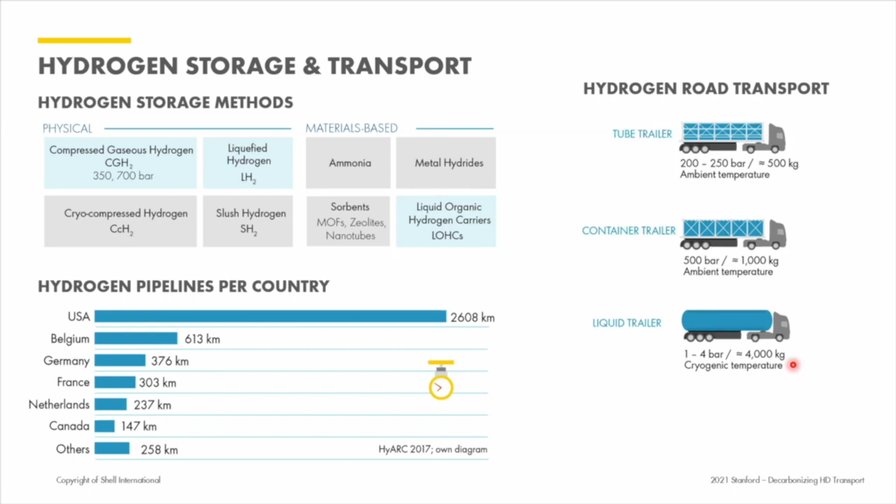For road transport, there are different ways of doing it. We have tube trailers, which can transport half a ton of hydrogen at 200 to 250 bar roughly. Container trailers, at 500 bar, can do about 1 ton per truck. If you want to transport more, it's probably best done in liquid form using liquid trailers with 1 to 4 bar cryo tanks, which can carry roughly 4 tons of hydrogen per truck.

So what are the ways to bring hydrogen to the refueling station? We might start at the top left. If your hydrogen refueling station has gas grid access, you can do steam methane reforming on site to get hydrogen. Even better is if you have hydrogen pipeline access, so it's easy to connect to that pipeline, but that's probably for the longer term.

Another way of doing it is to have an electrolyzer on site at the refueling station, producing the hydrogen you need from the power grid. If you don't have these options, the alternatives are delivering compressed hydrogen by truck, as I already showed, or delivering it in liquid form with a liquid trailer.

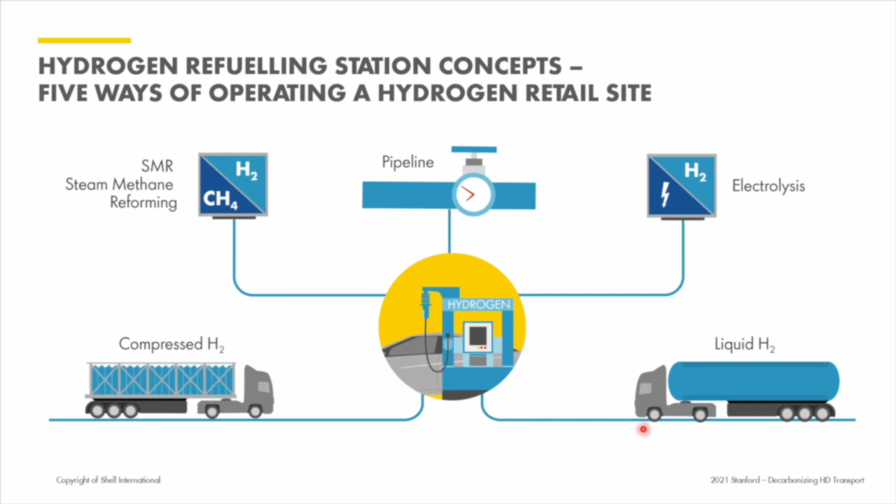Now, how does it look on a refueling station, and what are the key steps here? The electrolyzer might be on your station or somewhere upstream, but at the refueling station itself, usually what you have is a low pressure storage system. If you're delivering by trailer, swapping is a clever idea.

You might bring in a full trailer of gaseous hydrogen and take the previous empty one with you, so you have a real good swapping system in place. Then you'll need a compressor to compress your hydrogen from something like 200 bar up to maybe 1000 bar, which is needed for dispensing.

Another important piece of equipment is a cooler, needed because you don't want to exceed the tank temperature on the truck. With dispensing, temperatures go up, especially in hot weather, so you need to cool and pre-cool the hydrogen quite significantly.

At the bottom you see some numbers to give an idea of how a truck station would look versus passenger car stations. A small passenger car refueling station would probably have one dispenser. A larger one would have 4 dispensers, with a throughput of 1 ton per day, able to do 180 refuelings per day.

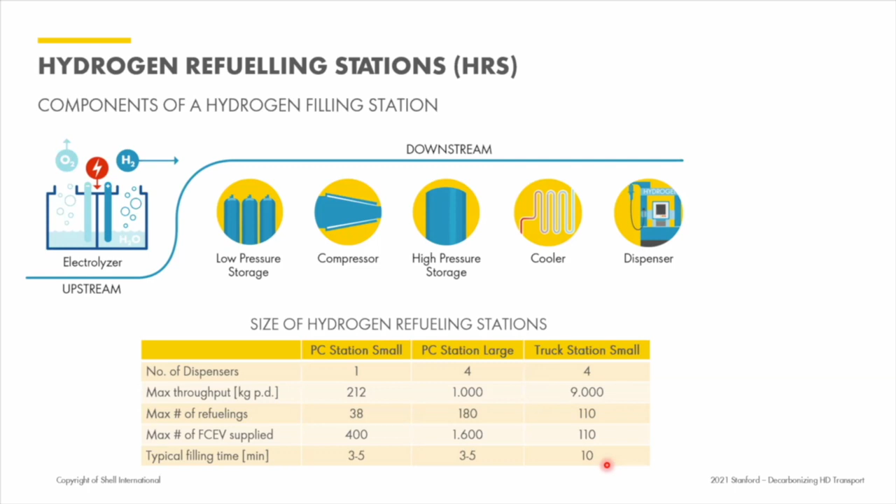Now we did a supply chain study to look into the different pathways of supply, and that is for the 2030 timeframe. I will try to get you through this without all the details, just to show you the pathways.

So here we have a pathway which is called National Compressed Gaseous Hydrogen Pathway. That would be a scenario where there's a central electrolyzer somewhere, maybe close to a big offshore wind farm or big solar field, so running on renewables. Then you would have to compress it to bring it to a hydrogen pipeline. From a terminal, you would have to compress it one more time to bring it on a truck, say to 250 bar, and then you bring it to the refueling station.

The other option is here, local case. So local meaning the electrolyzer is on the refueling station. So you only have to compress, you have some storage on the refueling station, and then you go to the dispenser.

Now we did calculate a pathway from North Africa, so sunny and windy place, low electricity cost, to Europe. Here, electrolyzer, you need a compressor to bring it to the pipeline. Then you have probably like a 3,000 kilometer, so whatever, 2,000 mile pipeline, to a cavern, to the end terminal, and bringing it per truck to the refueling station.

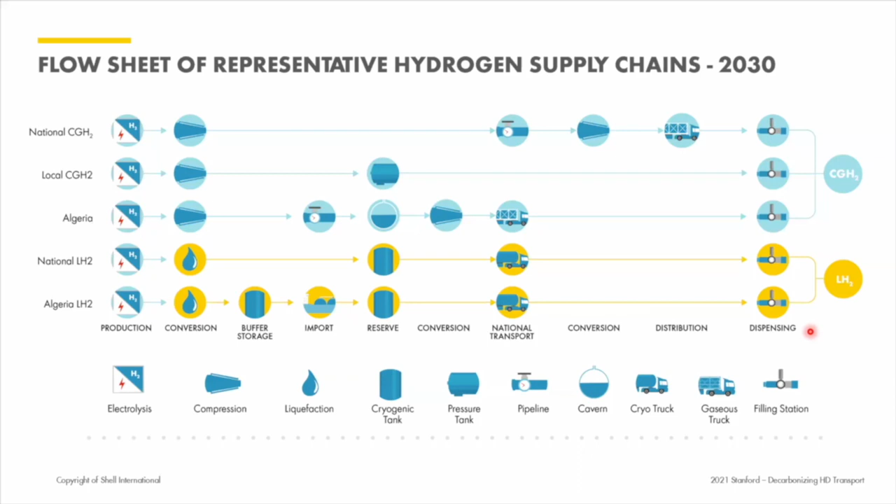So these are some of the options we looked at in closer detail. First of all, looking into the efficiency of the pathways, and that is what you can see here. So in all scenarios, you basically start with...

71% efficiency, which is due to the electrolyzer. That's what the electrolyzer efficiency is by 2030. Currently it's probably more in the 65% range, but by 2030 we think something well above, maybe beyond 70% should be possible. You have your local case here, and local means the electrolyzer is on site, as I said, of the refueling station. Along the supply chain you don't have a lot of losses, and that is why obviously the local case is the most efficient one.

If you go to 350 bar dispensing, you are probably here. You don't lose a lot because the effort is not so big. But if you want to compress to 700 bar, you lose some more efficiency here because of the compression. This is a national case. You have some more losses here because the supply chain is longer and you have longer distances, there's a pipeline in between, etc.

For the Algeria case, here you have significant losses as well when you come to the very long pipeline, like probably 2,000 miles. You lose quite some energy here, and then you're somewhere mid 50, close to 60% overall efficiency. Now if you go to liquid hydrogen, the big loss here is at the beginning, where you liquefy. Liquefaction is quite energy intensive, and you won't get that back. So in the national case, you have a little less losses to bring it to the dispensing. From Algeria, you have more losses because you transport by ship and you have boil-offs on the ship as well.

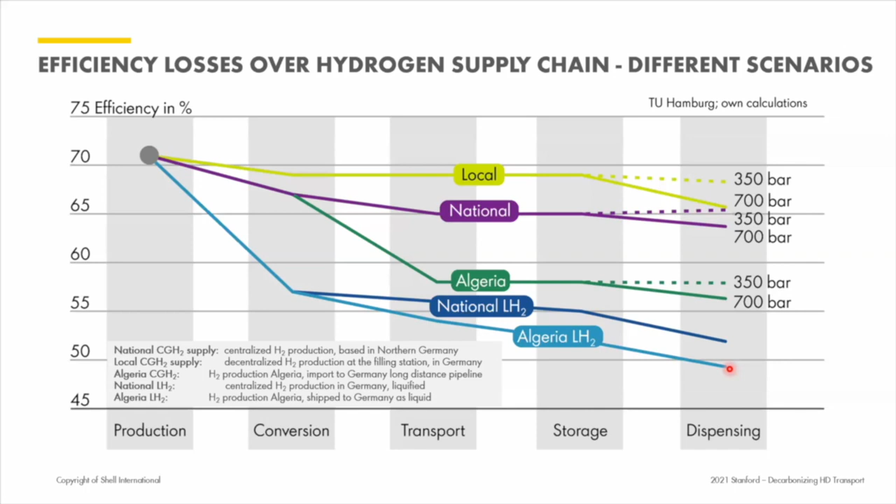Now, as we all know, efficiency is only one thing. It's important, but it's not everything. And even more important than efficiency is, of course, cost. And that is on the next slide, and you can see that here.

Now we have set the national 700 bar case on the cost side to 100%. We didn't put real cost numbers here because they vary very much, for example, with the electricity price. But basically, our base case, you can think of 100% here as something like, for the 2030 timeframe, possibly $5 per kilogram of hydrogen at the refueling, at the pump. So that's something which looks very feasible.

Now, if you do this on a local basis, so you have the electrolyzer on the refueling station, you have higher cost, and that is mostly because the electricity is more expensive, because you are somewhere at the end of the grid, and it's simply more expensive than if you were close to, say, an offshore wind farm, where you could take renewable electricity right away.

Interestingly, the Algeria case is at a similar level compared to the national production of gaseous hydrogen. So electricity is a lot cheaper in Algeria because it's sunny and windy, and renewable electricity can be produced a lot cheaper there compared to, say, Central Europe, which is this case. So electricity is cheaper, but then you have the longer supply chain and all the pipeline system, which creates costs.

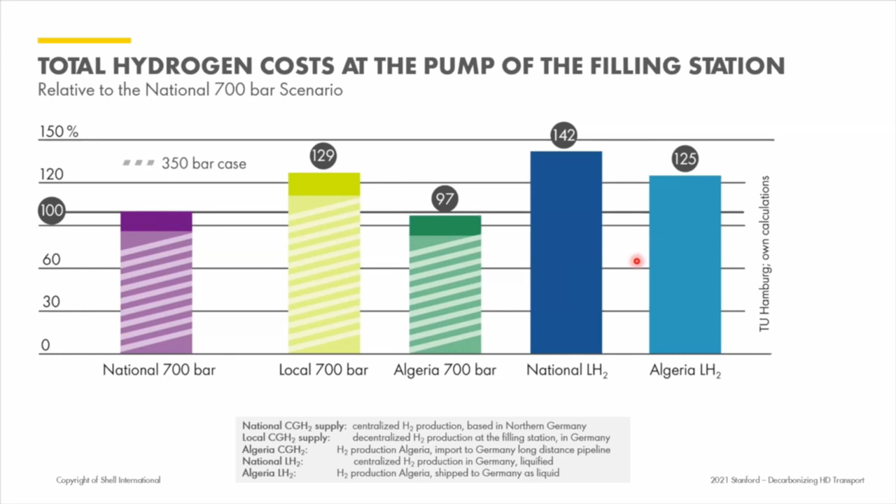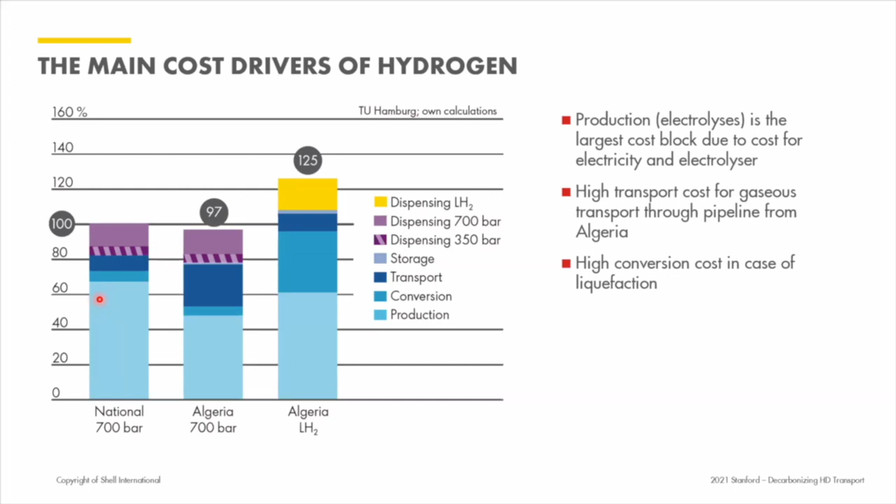And again, for the total numbers, keep in mind something like $5 per kilogram is probably where we'll end up. But every cent of lower power price results in 50 cents less per kilogram of hydrogen. So there's quite some room for cost reduction still, if electricity, especially renewable electricity, gets cheaper.

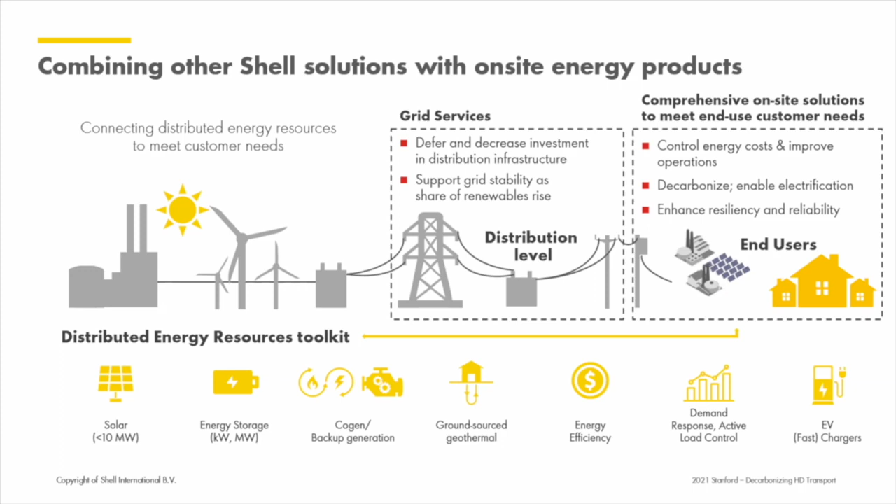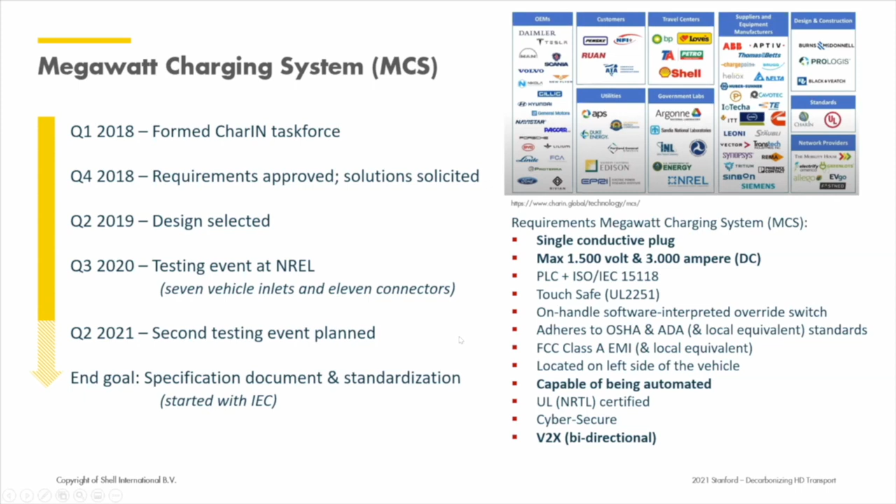So if you have a typical truck of maybe 500 kilowatt hours of battery capacity, if you're adding this in a depot together with 20 trucks, you're actually adding 10 megawatt hours of battery storage at that location. And this is actually rapidly, right? This is almost at the scale of utility size battery storage that's being deployed at the moment. Yeah, this started in 2018 and it's ongoing. And actually a testing event has been held by NREL recently to test some of these inlets and connectors that comply with this standard.

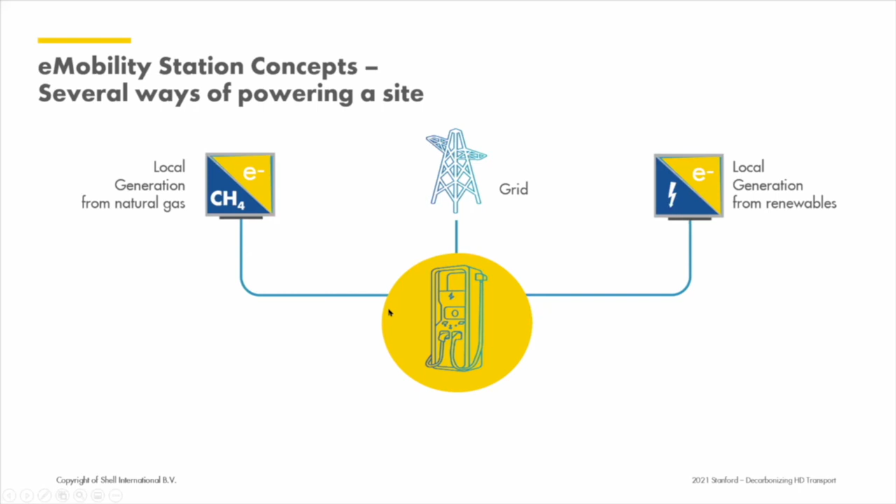But following also the story that Carson was explaining, if you have a charging infrastructure, you can power it by different means. So you can power it from the grid, which is a very typical solution, but you can use these local generation means as well. So you can locally generate power from renewables, or you can locally generate power from, for instance, gas. And in a study we did looking at the United States, we looked at several depots across different states, including California and others. And this is the result of that study.

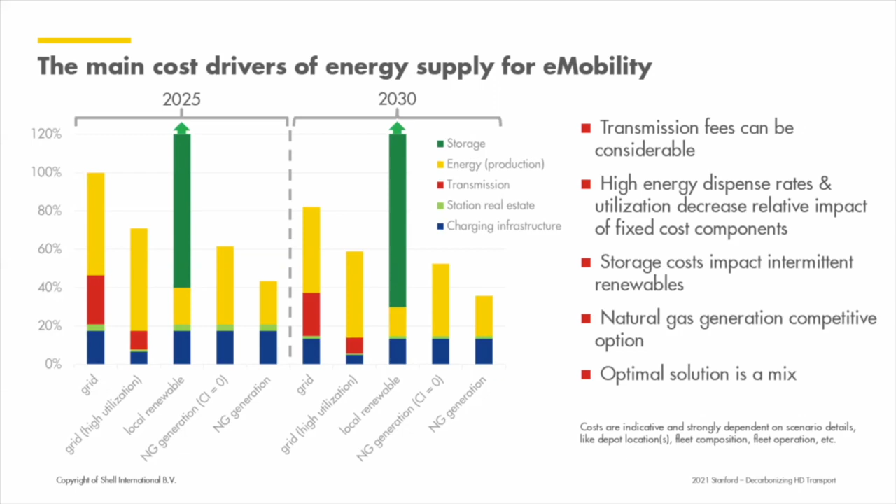And this is what I wanted to conclude: if you're talking about infrastructure for zero emission vehicles, particularly electric vehicles, you have a lot of levers to pull, and it's very important to consider all those levers to come up with the best solution overall to supply this fleet.

Thank you. So happy to hand over to the next speaker. Yeah. Hey, thank you, Raymond. That was brief and to the point. With that,

I would like to invite Al Chafi, who is the business development specialist at Plug Power. And I would also like to point out that now we are switching over to talking more about the business side of things. We heard from Carson and Raymond on technology, and now we're going to talk from the business perspective. So over to you, Al. Thank you. Thank you, Girish. Hopefully everyone can hear me. And let me bring my presentation up on screen.

So in my presentation today, I will speak a little bit about Plug Power, give everybody a common background. We're probably the most successful company in the hydrogen space that many people haven't heard of, or maybe don't appreciate some of the numbers that we've been able to achieve. Those are significant because we believe that our experience in things like the material handling space is a very good indicator of how the rest of the hydrogen economy and some of these applications are going to unfold. So I'll talk a little bit about our business and how we see the vehicles operating, and then a little bit about infrastructure.

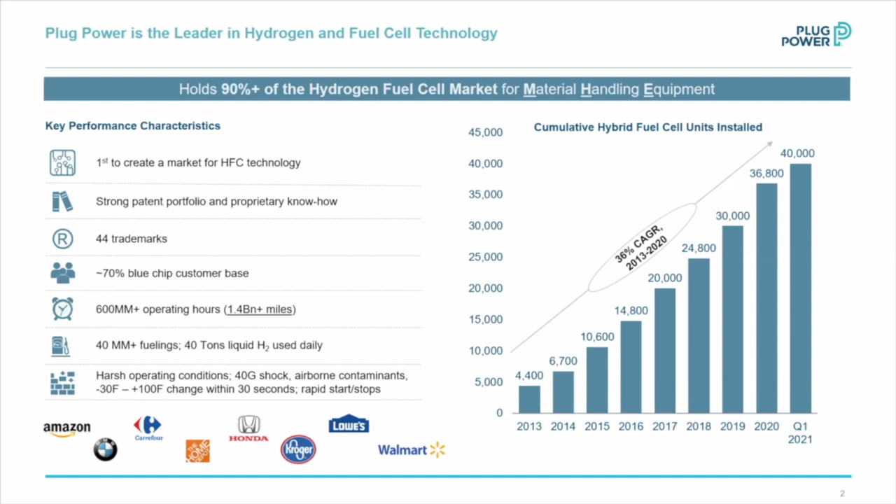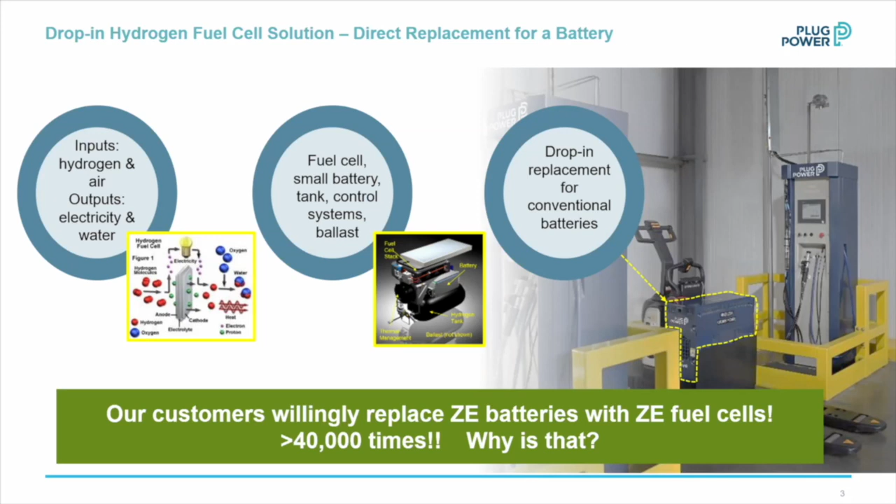So the thing that I would like for everyone to consider and understand is that our customers willingly replace a perfectly good zero emission technology based on batteries with a zero emission fuel cell. And they've done it 40,000 times. This is not an experiment. This is not a trial grant that the CEC or CARB has put out. This is real money that real customers are spending, and they're willingly replacing one perfectly good zero emission technology with another. Why is that? And the reason is because we are able to demonstrate compelling economic value.

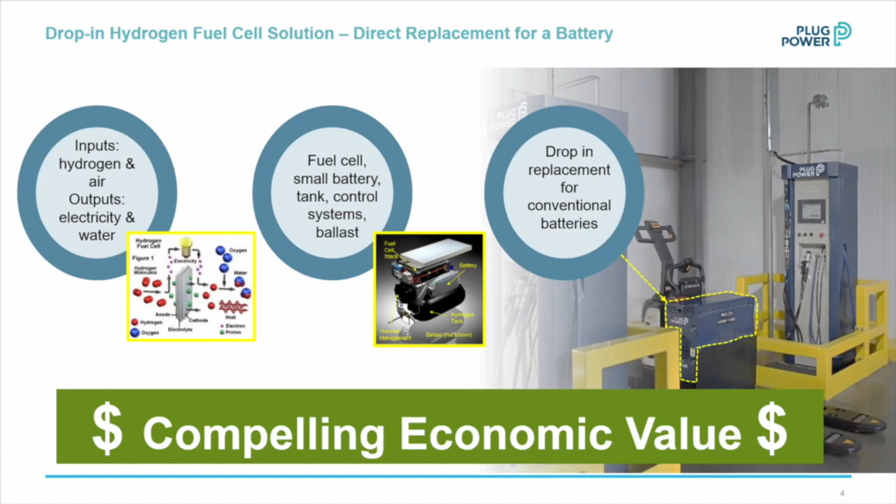And the way in which we demonstrate the compelling economic value is informative for how on-road vehicles and commercial vehicles will also travel along this path. And we've heard this throughout the day today. And this is Plug Power's experience. Our customers are highly protective of their data. In fact, this slide goes very close to getting them to the point of being perturbed, because they don't like for us to describe anything at all about their operational efficiency, because that's competitive advantage. But I've highlighted a couple of issues here.

All right, long recharge times. That doesn't exist with a hydrogen fuel cell. It takes about 3 minutes to replace the fuel in this vehicle. There's no long operator downtime. If the operator is refueling the vehicle and it takes 3 minutes to refuel the vehicle, as opposed to 20 to 25 minutes to change out the battery to replace it with a fully charged battery, that's real productivity improvement.

There is no drop off in performance throughout the shift. Batteries, as they discharge, the terminal voltage decreases. The terminal voltage on the output of our fuel cell is constant as long as there's hydrogen in the tank. Just like a diesel or gasoline powered vehicle will continue to put out power as long as there's fuel in the tank. There's no capacity loss with aging in the environment.

We're very, very good at working in wide temperature ranges of applications. Our customers will routinely report anywhere from a 15 to a 25% increase in labor and asset utilization.

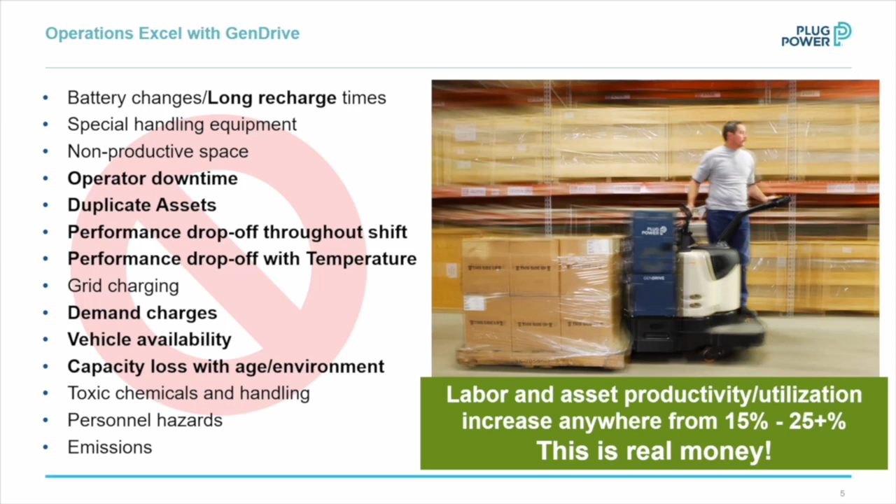We had one customer tell us that when they plan their new distribution facilities and new builds, they would deploy a model of about 350 fork trucks that they would have to lease in order to fully complete the mission of that distribution center. When they switched to fuel cells, our fuel cells in particular, that number dropped to 250 vehicles. That is real money, and they take advantage of the investment tax credit at the federal level, but there are no state grants that go into this.

So if I compare this experience to internal combustion engines and look at the kind of vehicles we're talking about, on-road vehicles, taxis, delivery vans, port equipment, drayage trucks, buses, even yard tractors and gantry cranes, the advantage of a battery-powered vehicle is in emissions. In all other cases, the fossil fuel vehicle really has an advantage. But a fuel cell vehicle very closely approximates the experience you have with a fossil fuel powered vehicle, and also has zero emissions. So our experience is that eventually this space will be dominated by fuel cells.

Now, as people have pointed out, there is no one size fits all. There are plenty of use cases where battery operated vehicles will make plenty of sense, certainly in the passenger vehicle range, where you have access to charging at home or charging when your car is parked. There's no reason to not consider that. But we believe that as you go heavier duty and heavier use case, hydrogen and fuel cells have a more and more compelling value proposition to make.

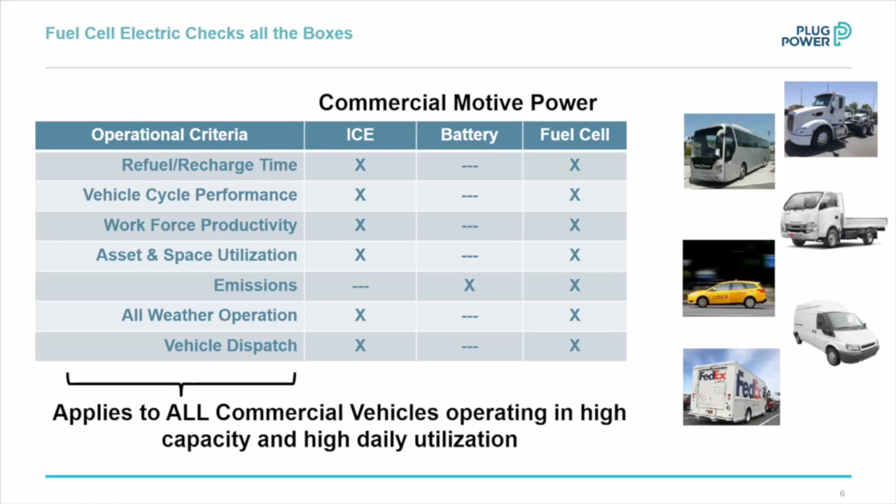This is mission critical infrastructure, and we're very proud of the fact that we've never run a customer out of hydrogen. We always make sure that hydrogen is there. You can do this in any number of ways: an electrolyzer on site, delivered gas, or delivered liquid. All of them can be renewable, carbon-free, or sustainable. Of those 140 stations, all but maybe 2 use delivered liquid as the primary method. Some have an on-site reformer just for backup, because of high local availability of natural gas in an area. But delivered liquid is the delivery and fueling technology that we have experience with, and it is the most cost-effective and most reliable way to go.

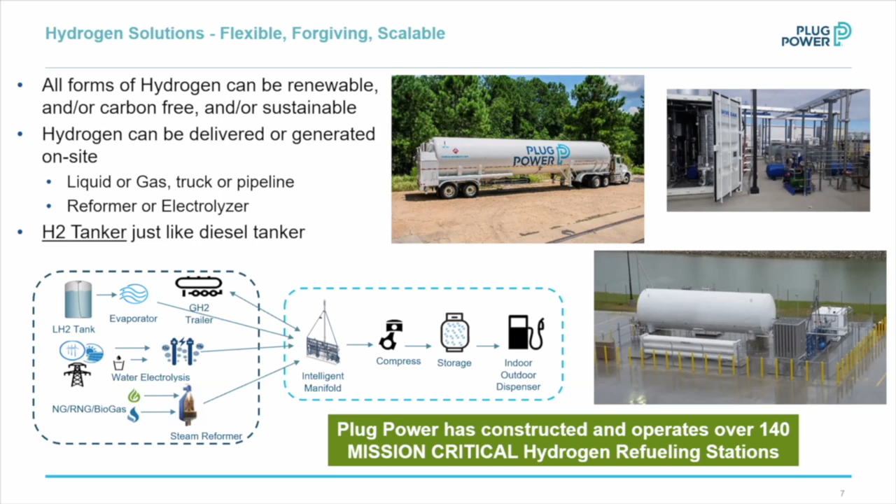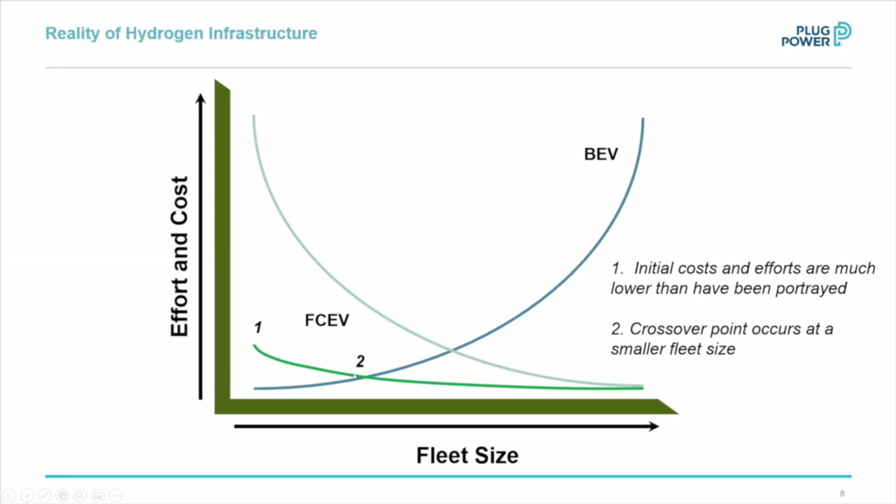The rest of them are pending various phases. By the middle of 2023, we expect to have somewhere in excess of 125 tons a day of liquid hydrogen production using 100% green energy. This will be 100% green hydrogen production.

We also have thought about using fuel cell powered vehicles to transport the hydrogen. It would be a very bad look to have a diesel spewing, diesel belching tractor pulling a trailer full of nice green, clean hydrogen. So this planning is underway, and we are making the investment to do this.

These are mechanical systems. They are designed with redundancy. They're designed to be reliable, but things break, and things break in unexpected ways. So we're making sure that we're planning the network so that the network itself has some degree of tolerance.

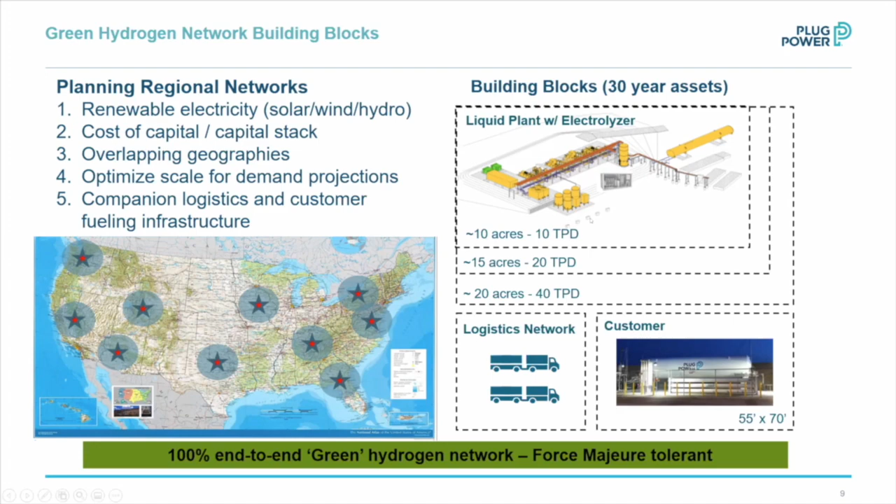And that concludes my presentation for today.

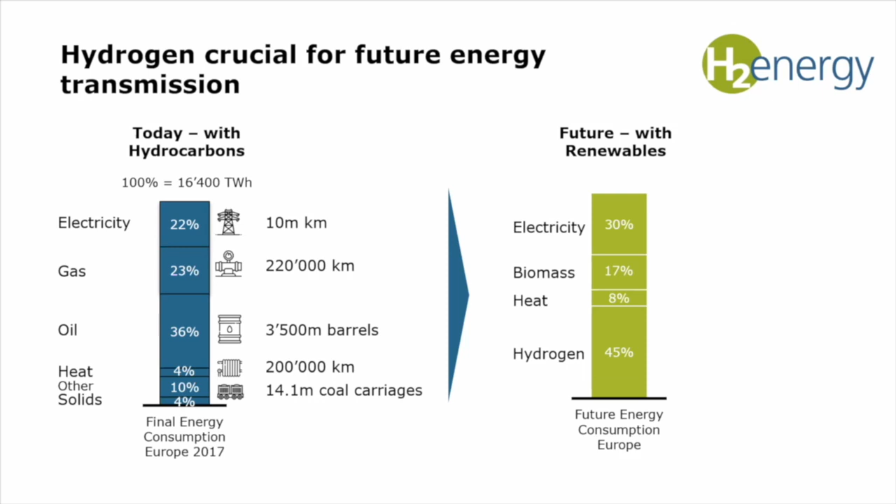And we tried to come up with an estimate. What we basically did is we defined the lower limit and the upper limit of the technologies, how they can evolve. The lower limit is really given by the situation as it is right now, and how we can max out the proportion of that renewable. The upper limit is just the maximum that could ever be achieved.

For example, in renewable biomass, you have a certain amount of acres that you can get biomass from on this planet, and not more. So we assumed that we don't plant anything for eating or have any animals. We only plant for the purpose of biomass, and it would then get up to 38% of the electricity, of the energy that we need to decarbonize.

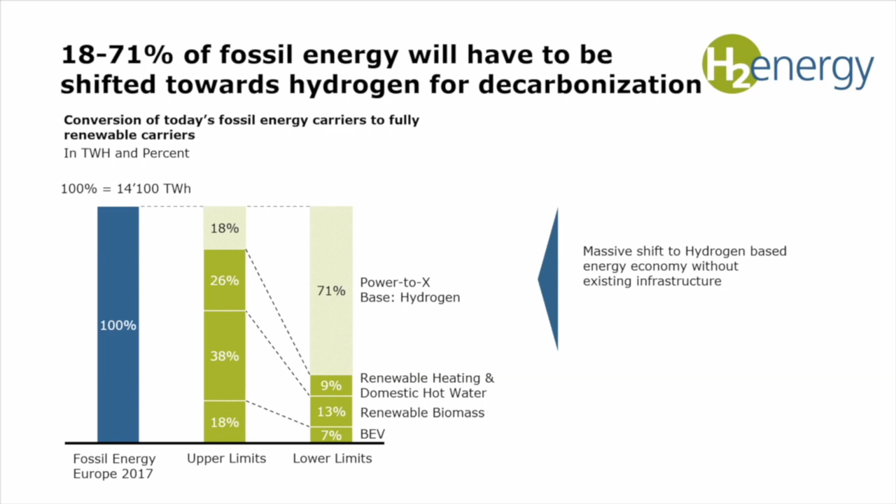But irrelevant of how you turn it, left or right, you're going to be short 18 to 71%, which you need to replace by hydrogen or e-fuels. Somewhere in between, maybe go for the arithmetic mean. This consideration was really what we had when we founded H2 Energy.

Now, H2 Energy is a small company with the goal to stop climate change and establish hydrogen as a pillar of the energy system. We're active in four fields. We develop fuel cell applications for transport on land and on water, but also for stationary applications.

We do engineering work for power-to-gas plants. We do engineering work for hydrogen refueling stations, and we develop ecosystems, because everyone talks about hydrogen ecosystems, but very few people actually think in terms of ecosystems. We're self-funded, profitable, and free of debt, but I guess that's not so much of interest to anybody but us.

So I wanted to quickly talk about the first project with regards to heavy duty. It all started with Coop, the largest retailer in Switzerland, which announced about six years ago that they want to be CO2 emission free by 2023. We approached them and said, if you want to be CO2 emission free, you need to decarbonize your heavy duty fleet.

They said, well, we wanted to, but it doesn't really work because we've bought some battery electric trucks, but they either don't have the payload or the range that we need. And we said, okay, we're going to build you a fuel cell truck.

At first they didn't believe that we were capable of doing so, but once we organized that, we actually received some support from the Department of Energy in Switzerland for this trial phase. They gave us the okay. They also own a petrol station chain, where we said we're going to build them a hydrogen refueling station, which was the first hydrogen refueling station in Switzerland.

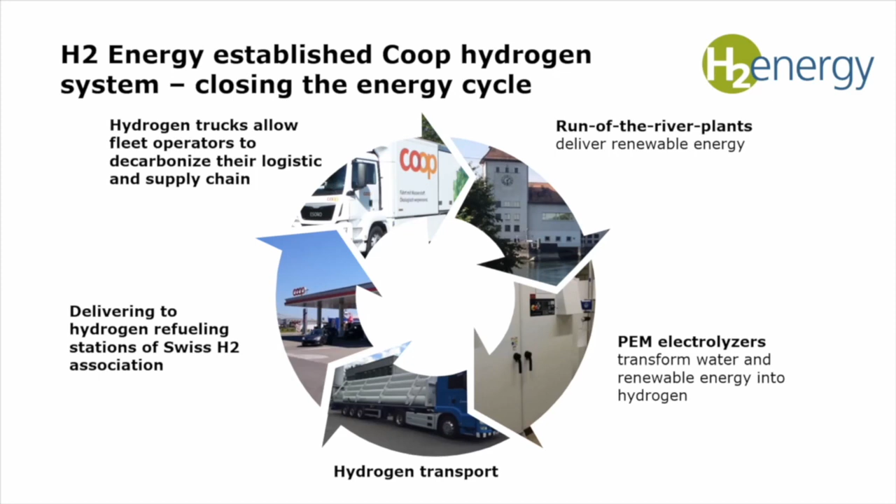And then we had a lot of technical data, like what's the degradation of the fuel cell, how does it work in winter versus summer, is there any difference? But most importantly, we got the financial data on this.

And what we realized in Switzerland is that we have a unique situation: there's a very punitive emission tax for heavy duty fleets. But if you don't have CO2 or NOx emissions, which a fuel cell doesn't have, you get exempt from that tax. Because of that exemption, we could offset the price of the truck and the more expensive fuel price. So we realized we have a business model, because we have a similar offering at the same price, but without emissions.

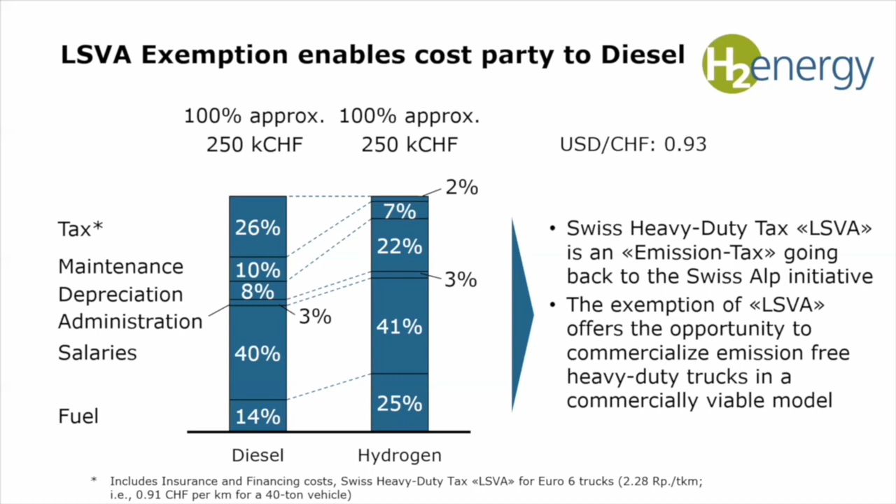The problem was just how can we scale it up, because we didn't see ourselves becoming a large truck producer, and Switzerland would not be a good location to start doing so. So we said we're going to develop a model where we have control over the ecosystem, and the best model to do so is to have a pay-per-use model.

How it works in essence is that the client pays a fixed fee per kilometer, and it includes everything except for the driver. So it includes service, maintenance, insurance, tires, hydrogen, everything, and at the end you get a fee per kilometer that you have driven. The charge per kilometer is calculated as a function of the size of the fleet that you're using, the expected kilometers you will be driving, and some specification on the truck which you require. We also index that price to the gasoline price, so if gasoline price goes up, the rate per kilometer moves accordingly, and the other way around.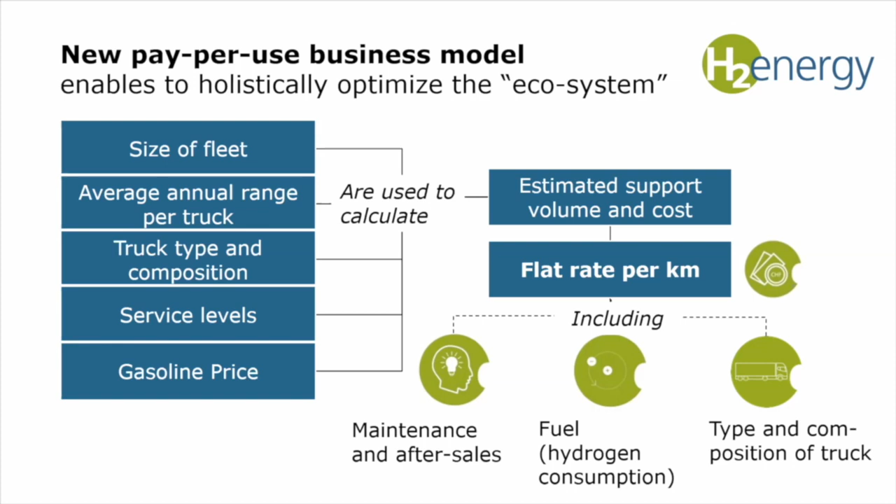So we start with this model. We actually now need the partners that we can really do this on scale. And to do this, we founded a joint venture with Hyundai. That sounds easy. It wasn't that easy.

We literally went to every OEM on that planet and looked for a partnership to build a fuel cell electric vehicle. But with Hyundai, we were very fortunate because Hyundai owns an extremely competitive fuel cell technology.

In addition, we founded Hydrospider for the production of green hydrogen from renewables, and at a later point, Alpiq, which is the biggest producer of renewables in Switzerland, and Linde, right now the biggest gas producer, joined that joint venture. We also founded an association with filling station owners and logistic companies for this.

So I will now quickly go into those three stakeholder roles.

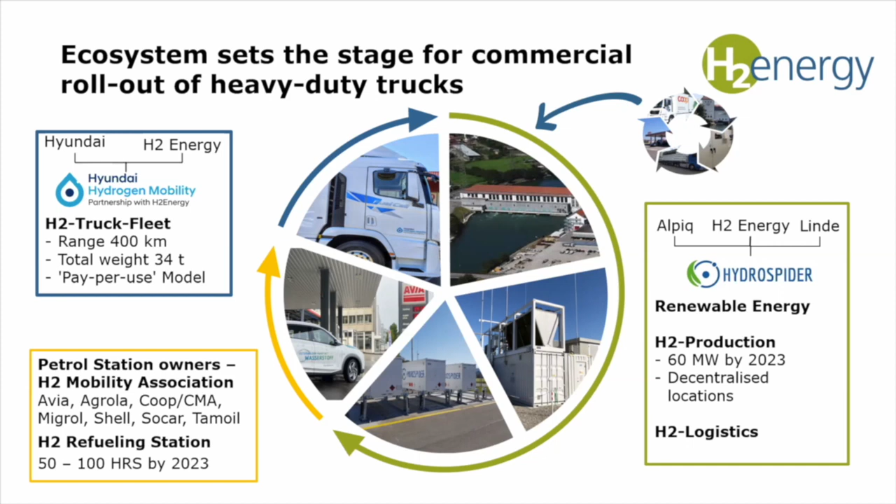Now, the first role, the Hyundai Hydrogen Mobility Partnership, that's a European-wide exclusive partnership. We right now have 46 fuel cell trucks in Switzerland. Most of them have been rolled out to the client. The rollout started in October 2020, and we will start the full rollout in the second half of this year. We're going to have a capacity of 2,000 fuel cell trucks to be produced per year by Hyundai.

And we now look to expand the model we have in Switzerland to other countries. It probably cannot be replicated the same way, but every country has certain opportunities that we look to build on, for a model that works for specific countries.

This is how the truck looks. On the bottom left is the first batch of serial produced fuel cell trucks, how they boarded. And on the bottom right, it's the first time that the truck refilled at the newly opened hydrogen refueling station in Switzerland. It's a 34-ton truck. Next month, we're going to get the 40-ton truck, and the tractor is right now in development.

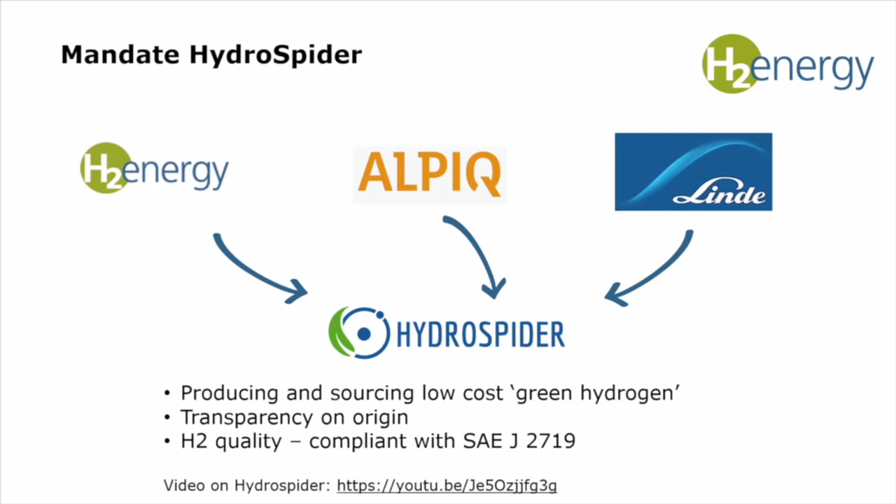Now on Hydrospider, I refer to a link on YouTube to explain some details how it works. Basically, Hydrospider produces low-cost green hydrogen. We use what Carsten actually introduced as trailer swapping, we just call it container swapping. So we use the containers as storage and for the distribution of the hydrogen.

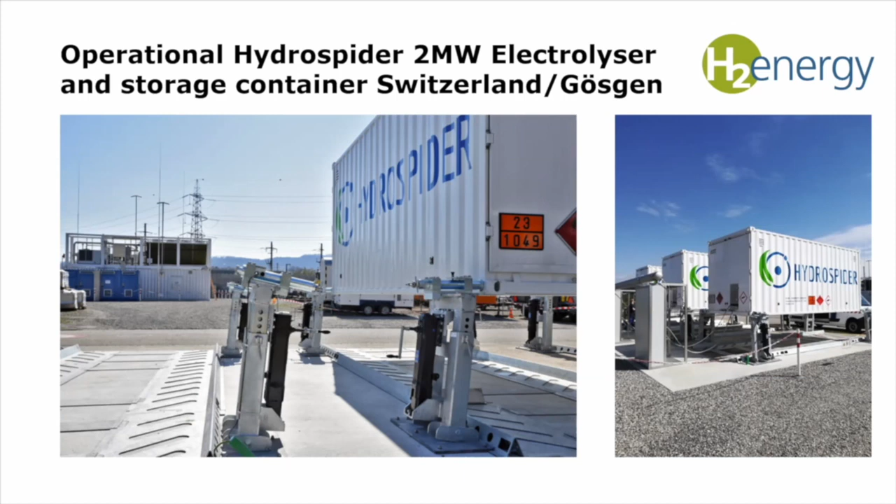We have PEM electrolyzers, which take the electricity before the meter, so we don't take the electricity from the grid. We don't believe in this. And then we put the containers at the hydrogen refueling stations and take the empty ones home.

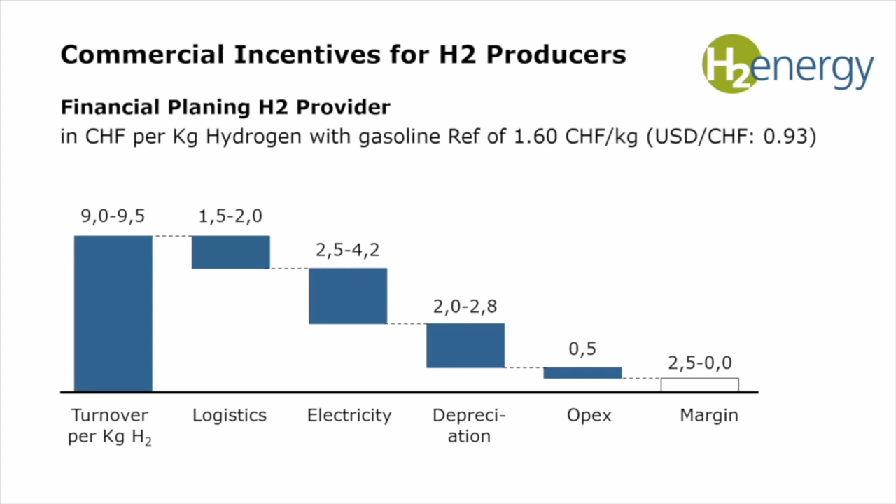And I come to the last stakeholder, which is the H2 Mobility Association in Switzerland, founded with 7 petrol station chains that cover roughly 80% of the petrol market in Switzerland, and 14 of the largest logistic companies in Switzerland, who have a strong demand for fuel cell trucks. We have opened 6 hydrogen refueling stations. They're all without any subsidies, all privately financed. And we try to cover first the northeast-southwest axis, because that's the axis which has the most traffic for distribution trucks.

And we have another 4 stations to be open in the next 4 months. For 2022, we're already working on an additional 8 stations where we can also tackle the north and south axis in Switzerland.

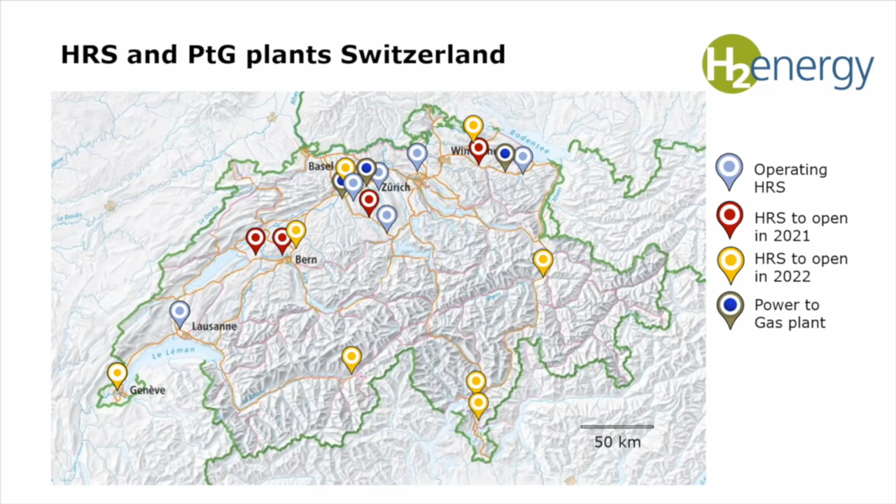And you need to have a margin for the hydrogen refueling station, because they need to get their capex back and their opex covered, and that margin is somewhere between 1 and 3 Swiss francs. Now, the cost to run a hydrogen refueling station per year is roughly $200,000. And if your margin per kilogram is 2 francs, or $2 - it's almost the same - it means you need to sell about 95 tons, 95,000 kilograms of hydrogen to break even and have a small profit.

Now, a passenger car uses about 130 kilograms of hydrogen a year, because on average in Switzerland they drive 13,000 kilometers. So it doesn't really work, because you would need 750 passenger cars to break even on your rate base. But a truck actually uses 7 to 8 tons of hydrogen, so you need less than 15 trucks to break even.

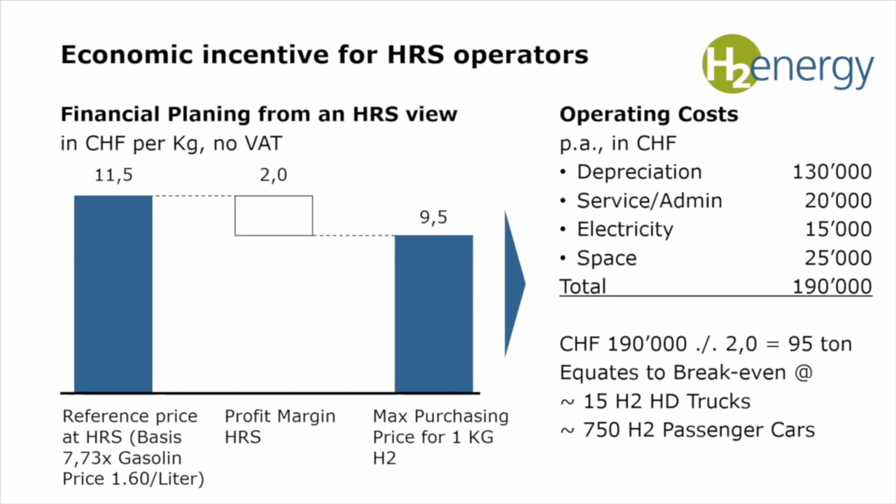So we're actually only using the trucks to build up a grid of infrastructure for production of hydrogen, but also distribution of hydrogen, because we can steer it better. It's a cheaper technology because we use 350 bars, and we can synchronously build up this infrastructure in Switzerland without requiring any subsidies.

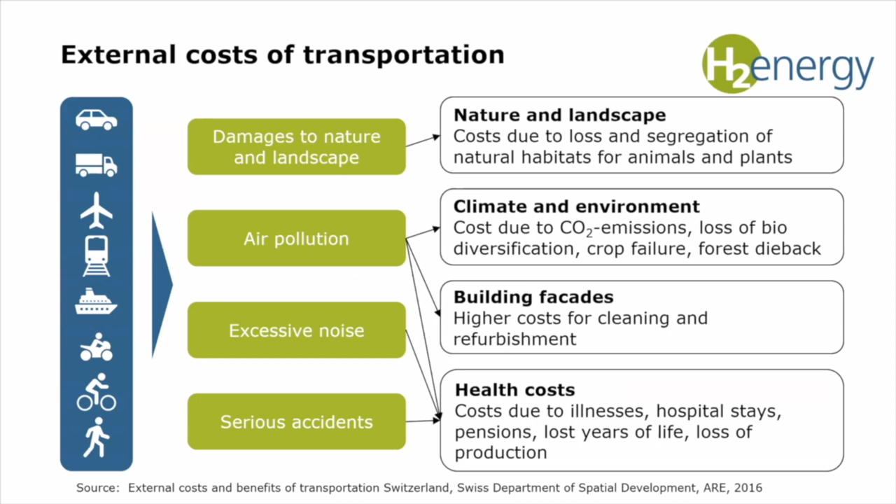As expected, I'm missing the time for the external costs, but I'd like to thank you very much for your attention, and look forward to the panel discussion.

Thank you. That's wonderful, Patrick. This does make a case for hydrogen and heavy-duty transportation, and I'm really intrigued by your point about being able to make it work without subsidies. Hopefully we'll come back to this in the Q&A.

But now it's my turn to move to the policymakers, and we have heard a lot about the technology - a lot about hydrogen, a little bit about battery electric vehicles. With this, I'd like to go to Ben De Alba, who is at the CEC, to talk a little bit about California's approach to electric transportation, which includes batteries versus fuel cells, particularly focusing on heavy duty. I'm curious about this thought-provoking statement Patrick made about maybe we need to use heavy-duty trucks to create the hydrogen refueling infrastructure in the state. So with that, over to you, Ben.

Well, great, thank you for that. A lot of exciting presentations already today, so I'm very privileged to be among the panelists from earlier this morning and my fellow panelists right now. My name is Ben De Alba. I'm an advisor to Commissioner Patty Monahan at the California Energy Commission, and she is the lead commissioner at the Energy Commission for transportation electrification and just transportation generally, with regard to the work that we do there. There are a lot of exciting things happening in the world of hydrogen, much of it reflected here at the Energy Commission, and I'm going to touch on some of those things.

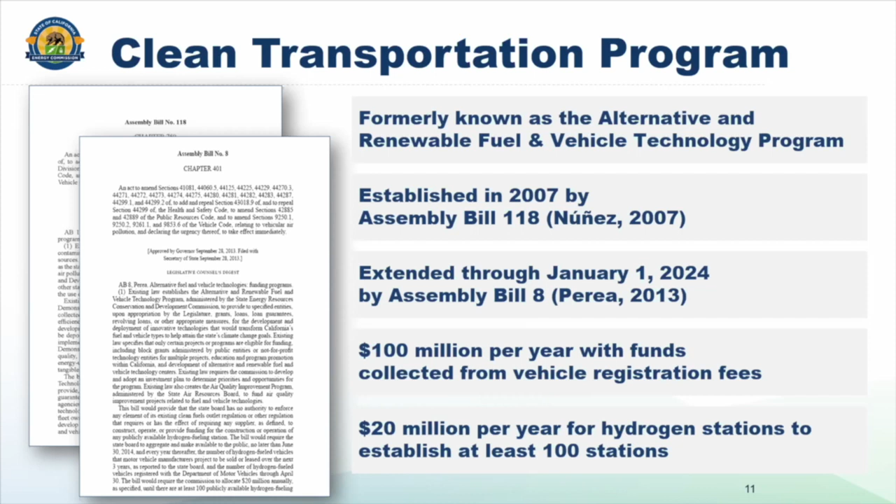And I will add, well, 45 is the number at the end of 2020. We are projected to have about 179 hydrogen stations, getting close to our 200 goal relatively soon. We have a current solicitation or grant opportunity that has awarded stations in California, and we expect to fund about another 130 or so stations to get us close to that 179 number.

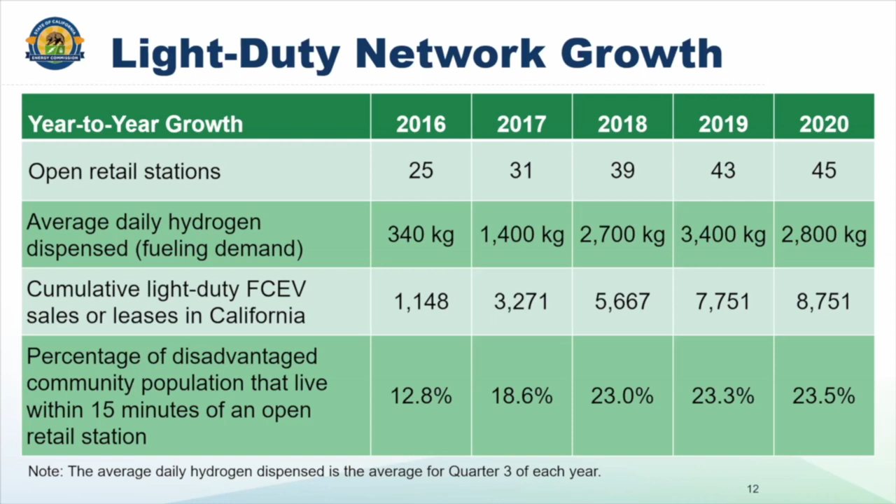Okay, so medium and heavy duty. I know this has been talked to at length here, but fuel cell trucks and buses offer some advantages over their counterpart, the battery electric versions: there's weight reductions, the refueling time is not as long, and they have extended range.

Within that solicitation I was just referencing for the light-duty stations, we're asking that the private developers that we're giving money to co-locate some refueling for medium and heavy duty vehicles at those light-duty stations. And so 13 of those will be considered dual purpose. They'll serve both light duty and medium and heavy duty vehicles. Those are still in development. We haven't seen those actually be constructed yet, but it'll be interesting to see the results and how those function. The idea, of course, is if you co-locate, you lower the cost; you bring the hydrogen to one location for a broader set of vehicles.

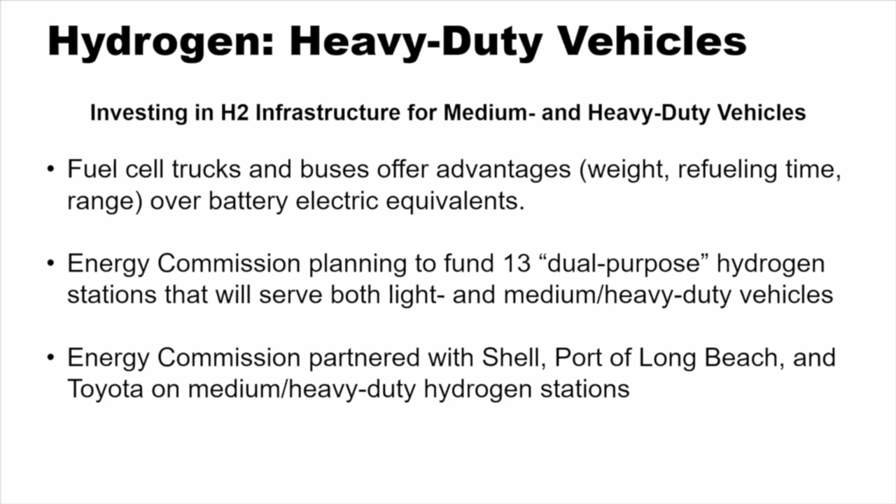And our really first foray into the medium and heavy duty hydrogen area was a partnership with Shell in the Port of Long Beach. That's still going on today. I think we heard from a Toyota representative this morning, and that project is in place now fueling some Class 8 trucks down at the Port of Long Beach.

Okay, so the Advanced Clean Trucks Rule, as I mentioned in that timeline, is going to be a huge driver, along with the governor's executive order, to bring zero-emission trucks and buses to the market, fuel cell vehicles included. By 2030, under the rule, zero-emission truck sales would need to be about 50% of Class 4 to 8 straight trucks, and about 14% of all truck sales. So this is a huge driver, and we're doing a lot of planning to ensure that the infrastructure is going to be in place for these vehicles when they come to market.

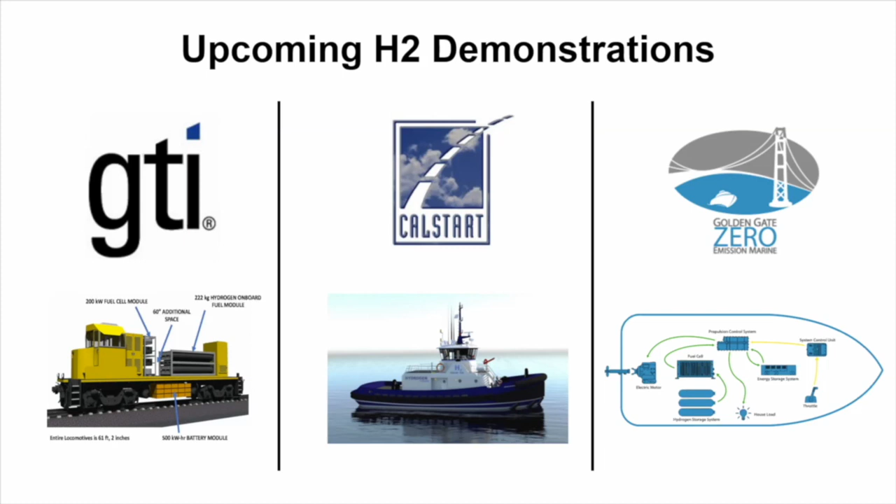We awarded some funding to some transit operators. SunLine Transit, as many of you may already know, is a leader in this space. They have a large fleet, relatively speaking, of hydrogen buses. We awarded them some money to increase their fleet by 17 hydrogen fuel cell buses, and we're going to provide some funding for the infrastructure to fuel those buses as well.

And then North County Transit, we recently gave them, in the same grant opportunity, some funding to add 25 fuel cell electric buses to their fleet by 2045. And so really excited to see that these buses are going to be added to the fleet and get the data and experience that we need to share with other transit operators across the state.

Now, just the other week on April 5th, we announced some of the biggest grants that we've given out in the demo world for zero emission trucks and buses. This one is for trucks. Specifically, we partnered with the Air Resources Board, who's providing funding for the vehicles. The Energy Commission provided funding for the infrastructure, but the project there, number one, is for 100 battery electric drayage trucks that will operate in Southern California.

And then the second one, proposal 6 there, is a project that will demonstrate up to 30 fuel cell drayage trucks. So we're really excited about these. These are really brand new. They haven't even been approved by the commission, but we are recommending award for these projects. And so a lot of excitement around these, and they'll be unfolding over the next couple of years.

So I think I'm at time. I was going to get into some of the production side of things, but I'm going to leave it there and look forward to the conversation. Thank you very much.

Thank you, Ben. That was wonderful, and I hope you can get to some of your remaining material in the Q&A. Now, I would like to go to our final presenter, Rachael Nealer, who is at the Department of Energy, and we'd love to get a perspective on how the U.S. as a country is thinking about these issues. So over to you, Rachel.

Great, thank you so much. Really appreciate being here today and making sure that my slides are being shown. All right. So yeah, thank you so much. I think this is a great one-two punch from me and Ben.

I just want to note up front that Ben mentioned the ability for California to do regulatory and grant awards kind of in the same bucket. And so I just want to differentiate the Department of Energy a little bit. At the federal level, we're largely in the grant bucket. We're not doing the regulations. We leave that up to our DOT and EPA colleagues in transportation.

So that means that I get the privilege to talk to you about all the great research and development and the exciting things that are happening on the cutting edge of research and development through the Department of Energy. So today I'm just going to talk very high level about the sustainable transportation strategy at the Department of Energy.

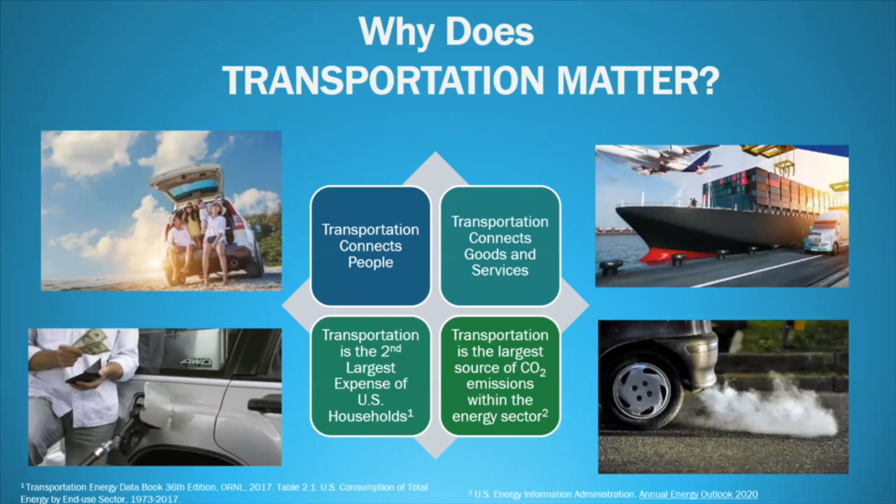And so the medium and heavy duty sector really is a large piece of the puzzle these days. It's over 40% of transportation energy usage. And we talked a little bit about the light duty market. You know, electrification right now is a major priority for this administration to make that transition. You can also see it in a lot of the automaker promises of transitioning the light duty sector over to full electric vehicles by around the 2035 timeframe.

We do expect there to be still some hydrogen fuel cell vehicles. You know, there are going to be applications in the light duty sector that are conducive to that market, and likely in pockets, like I said, maybe around ports or different hubs. California has invested a lot in the hydrogen infrastructure already, so California already has the majority of the fuel cell electric vehicles deployed. So there's probably going to be pockets of light duty hydrogen fuel cell vehicles in the future.

But we're expecting and hoping that to decarbonize the full light duty sector, we will be able to also meet a lot of the consumer needs with electrification. And potentially even biofuels, right, for the legacy fleet that is more difficult to turn over. But that still leaves medium and heavy duty. And like I said earlier, there's a lot of different end uses. So although it's over 40%, you can see that even that 40% is broken down into various components.

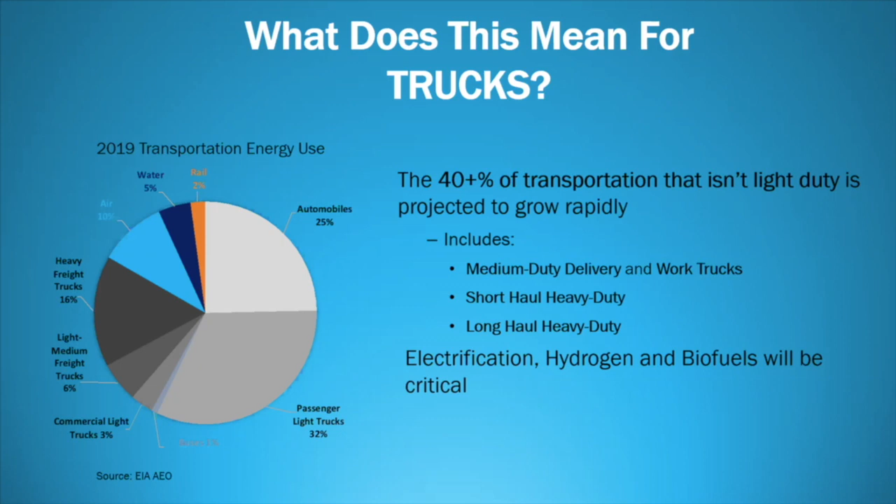And even within those components, heavy freight, light and medium freight trucks, commercial light trucks, air, water, rail, those are all very different applications. And so they're probably going to require different technology innovation and fuels. So it comes down to what are the biggest challenges in transportation for any of these technologies.

What are the supply chain requirements, the materials that we need to extract? Where are we getting them? Both on the supply chain and the manufacturing side, there's a big push to build a more resilient supply chain and manufacturing network for the US. So making sure that the materials we need are coming from the US and being built in the US, and providing jobs to US citizens, and not even just US citizens, anyone living in the US at the time. So it's really important for us to build that out.